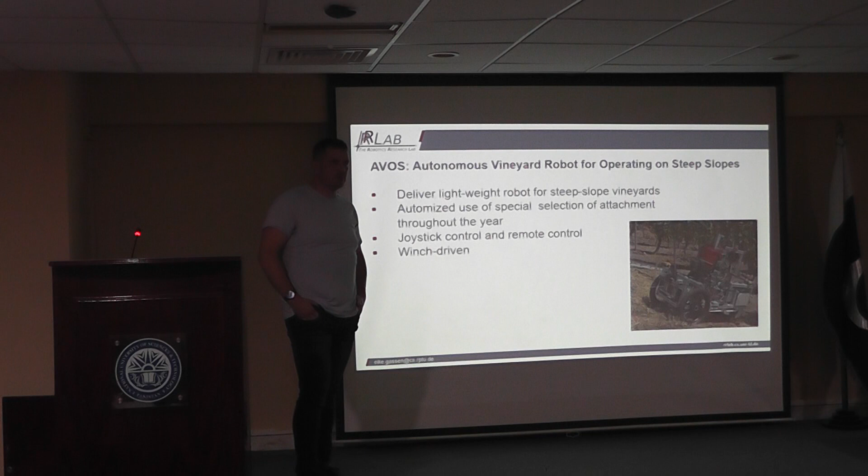I have a question about the diagram we saw. There was a pulley pulling up the tractors in the diagram. Yes, these pulleys pull the tractors upwards and then go in a cycle. So installing these pulleys can be an issue, and the technology is delicate on the tractor. What if the pulley breaks or something happens to it? Yeah, there's a safety problem, of course.

First of all, the rope is mounted and the winch is mounted on the vehicle, because if you do it that way, the vehicle doesn't really move over the ground. So it's not the vehicle, the steel rope that is moving over the ground, so it's not so likely that the rope will break. That is the first reason why we mounted it here.

But second, we have two approaches for how we want to do it. There's a safety brake, like a thorn or something going into the ground which blocks it. Additionally, we want to steer into the plant, because it's safer to destroy the plant and drive into it than to drive downwards and hit a vehicle or people. So we want to combine driving against the plant with braking by putting a thorn or something into the ground. Won't that destroy too much yield if the object is too heavy?

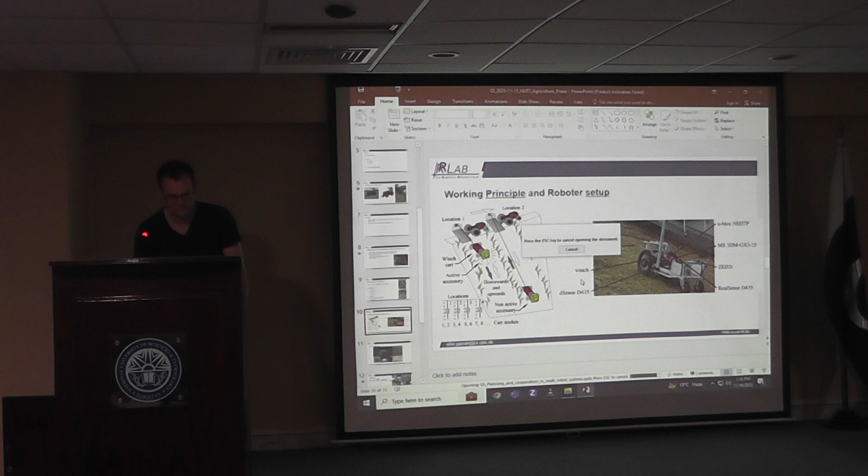Okay, so good evening everyone. Thank you for the introduction. My general topic is about planning and cooperation in multi-robot systems. So we still stay in commercial vehicles, but now we want to look at systems where we have multiple robots, theoretically also of different types, which want to work together with each other.

For that, I will shortly start with a project which was already running during my master thesis, where I also participated and worked for the first year, about autonomous street compaction. Then I want to look forward to some different scenarios, for example soil compaction, where we have much larger areas and a much wider variety of vehicles.

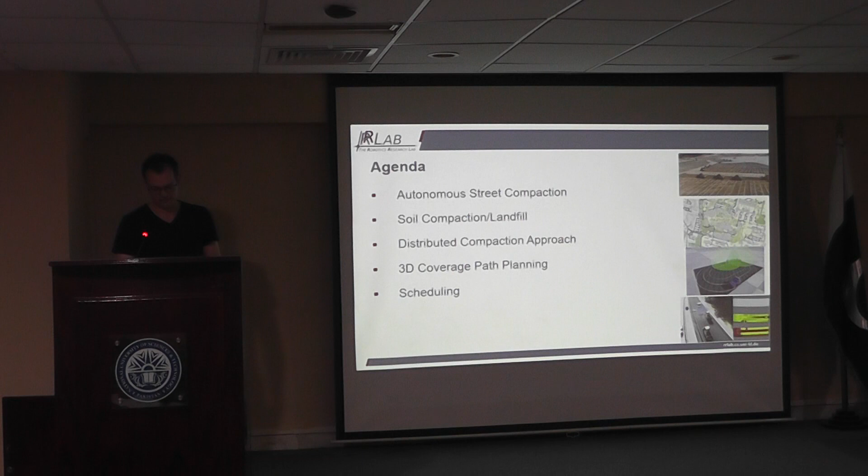Typically for road construction you have a paver, which is the vehicle in the background spreading asphalt. Then you have drum rollers which are compacting it. In that image it's only one, but typically you have multiple ones.

Up to now those tasks are always done by humans, and our aim in the project was to automate the compaction behind the paver. So we wanted to have autonomous driving drum rollers which can automatically drive different tracks.

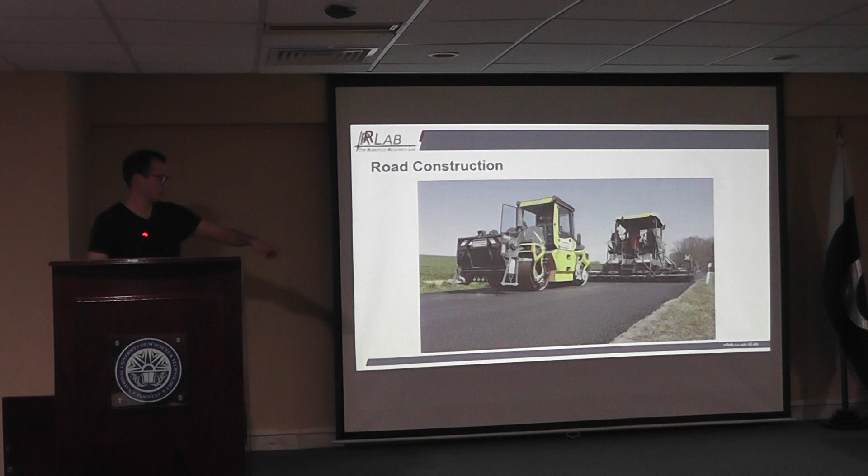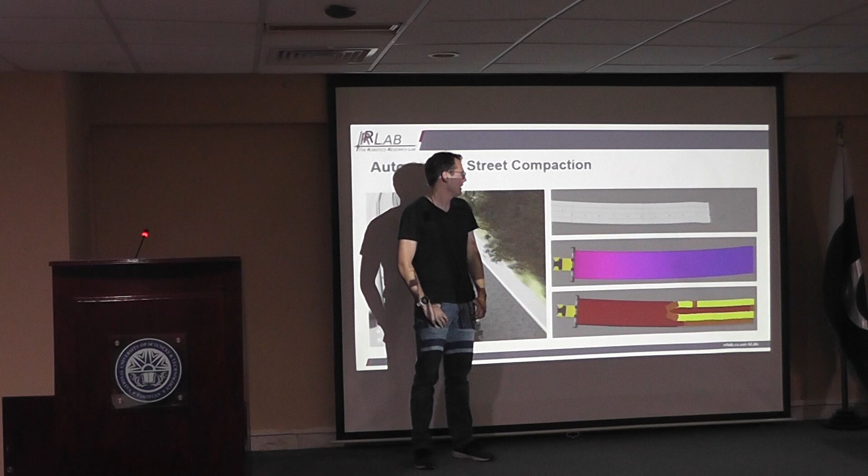They are also overlapping, because we don't want any areas which are not compacted in the end. This also means that while one vehicle is driving on the outmost track, no other vehicle can drive on the track next to it, because there would be a collision.

Then we had some properties to consider. One is temperature, because there are temperature ranges in which we can drive on the area. For lower temperatures we don't have any effect, because it's already too hard. For too high temperatures we could completely destroy the road, so we also have to wait a bit before driving on the ground.

Those temperatures can be measured on the paver in the front, and also by the rollers when they drive on the area. In the beginning we know the initial temperature, and we have a rough model estimating how fast the temperature is decreasing. When driving over the asphalt, we can also measure the current temperature, so we get an update as soon as we start driving there.

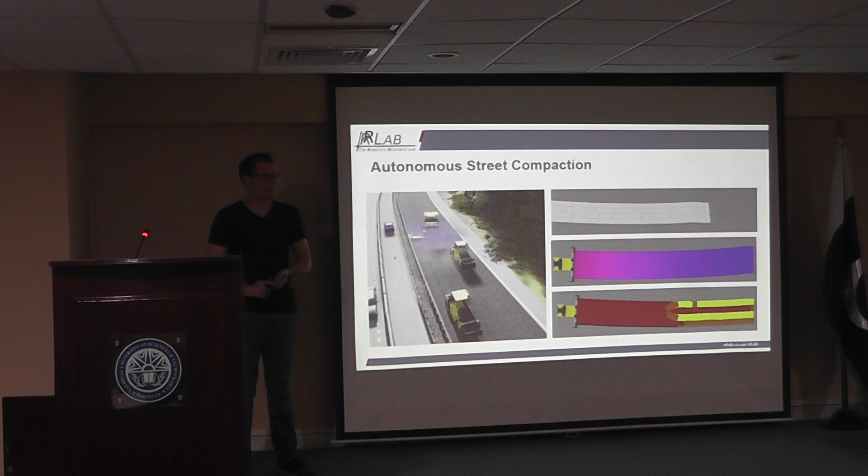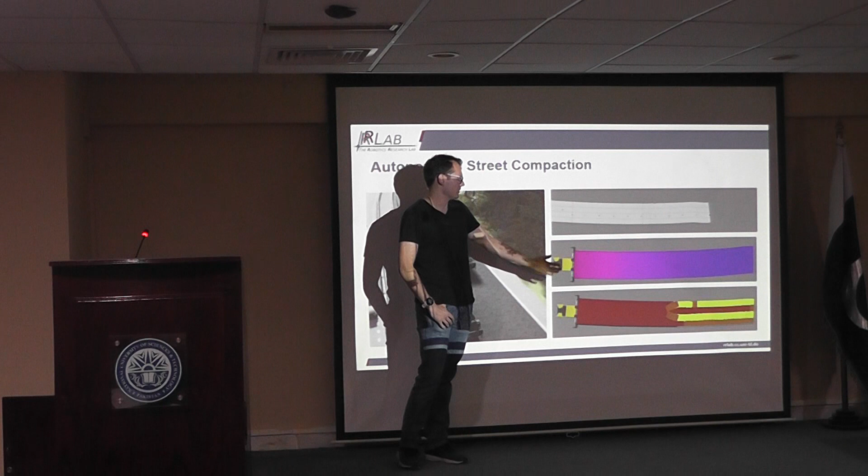We also have some measurement for the compaction, using two different methods. For the simulation, we just counted how often we drove on each area, shown here. The red area means we didn't drive at all, and it goes in the color range to green, which means it's fully compacted.

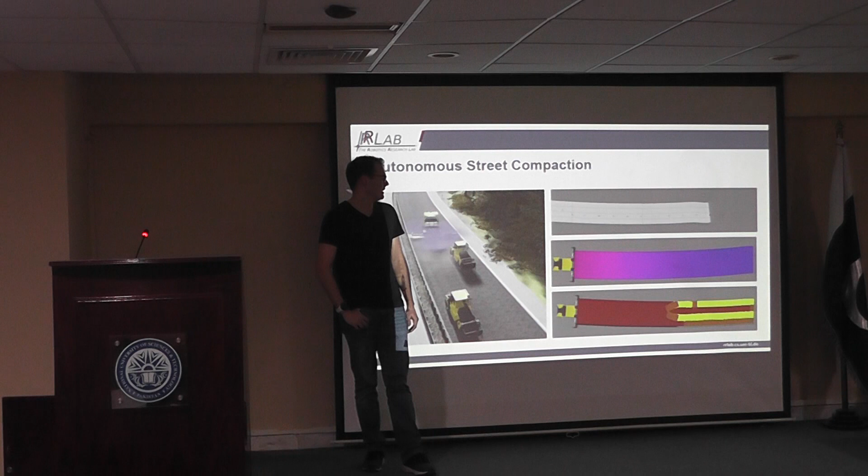For the simulation, we typically say we want to drive on each area 4 times. In reality we never did that in the end, but it's possible to measure the compaction also with a drum roller, so there we could take the real values to update the map.

So maybe I'll start with the video and explain a bit during it. This is one test in simulation. I think the speed here is 8 or 16 times the normal speed, because typically vehicles drive with, I think, up to 5 kilometers per hour, so really slow.

You can see we evaluate the tracks based on the compaction and temperature, and give a priority value to them, then assign them to the different vehicles. As soon as it's finished, or almost finished with driving, we look for the next possible track, and once again assign it to the vehicle.

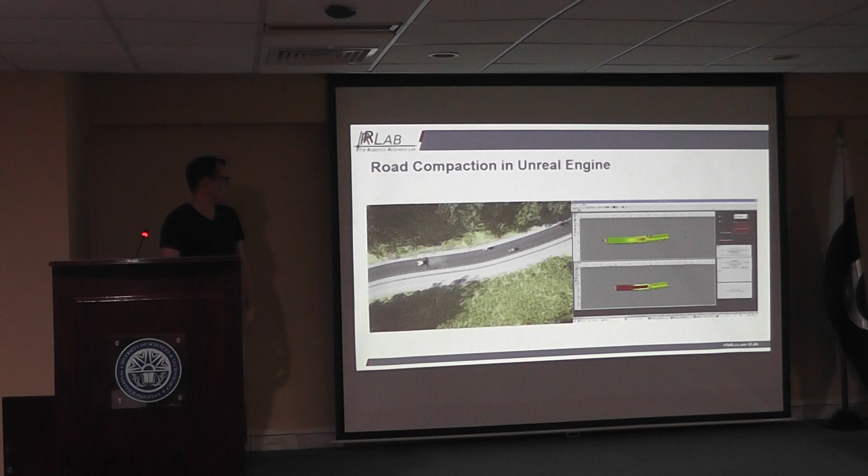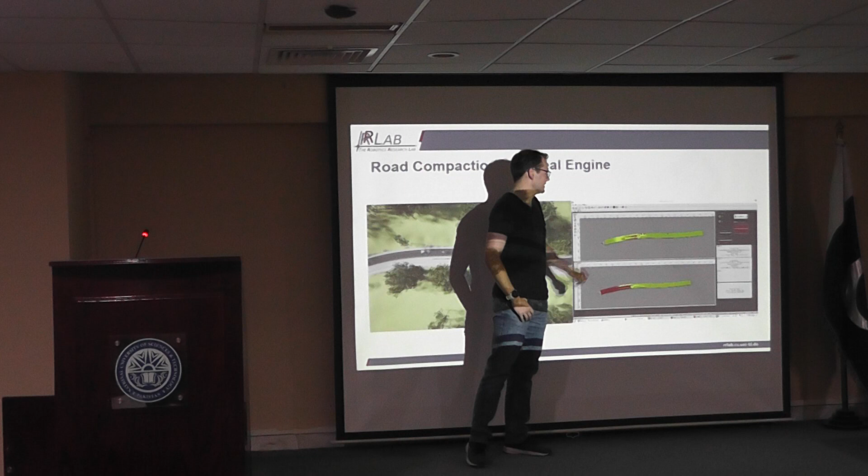Some tracks are blocked because of vehicles already driving there. We also have some cases where we want to compact 2 tracks in a row, just to save the time for maneuvering to the next one.

Here you also see one of the big advantages of the simulation, because it's possible to just start it and let it run for, I think the longest ones were like 45 minutes. And if something crashes, you can just restart and find why it happened, which is not that easily possible in the real scenario.

I think that was about 1 year into my PhD, when we also had a final presentation of our project.

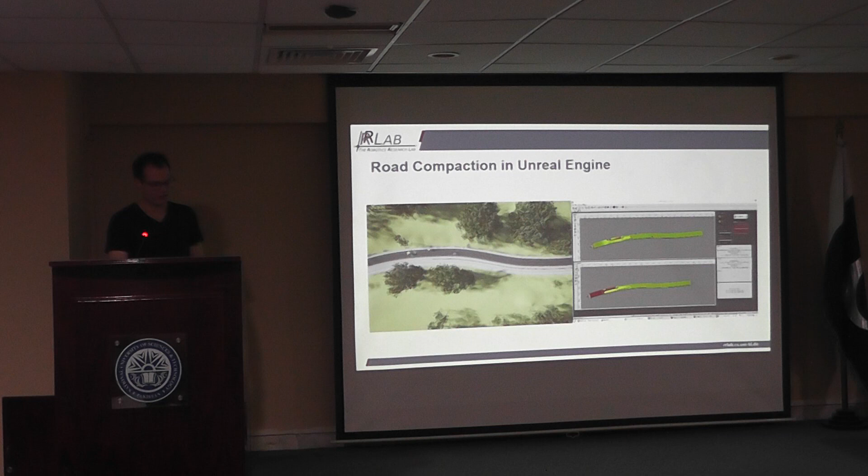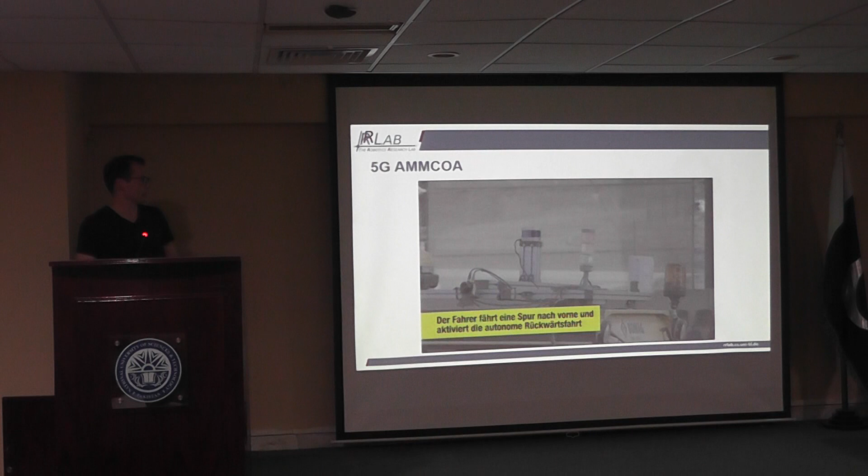We also have some other co-workers whose work was involved here. We had 2 of our drum rollers set up with different sensors. In one scenario we used GPS for localization. Here in the final presentation we used a LiDAR sensor because we were inside of a hall, so we used the structure of the hall and an iterative closest point algorithm to compare our point clouds with reference point clouds, and by that calculate our position.

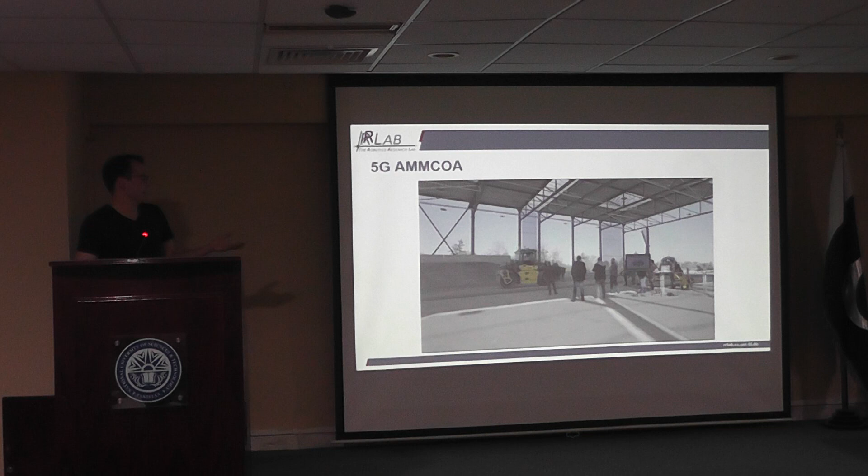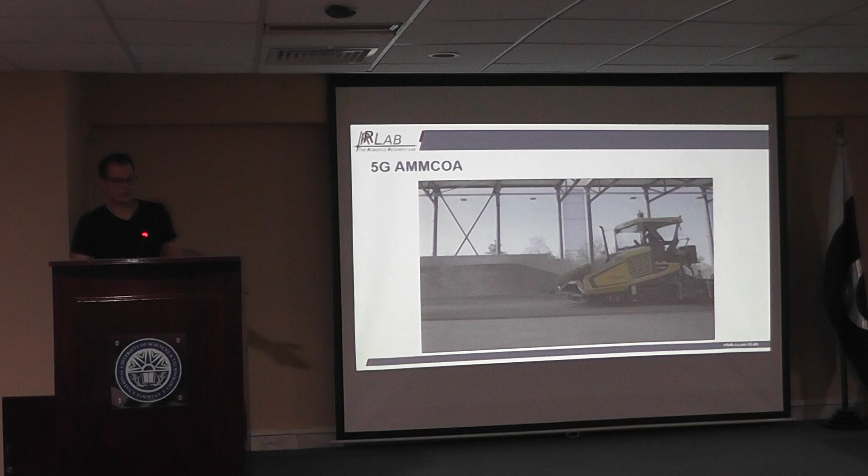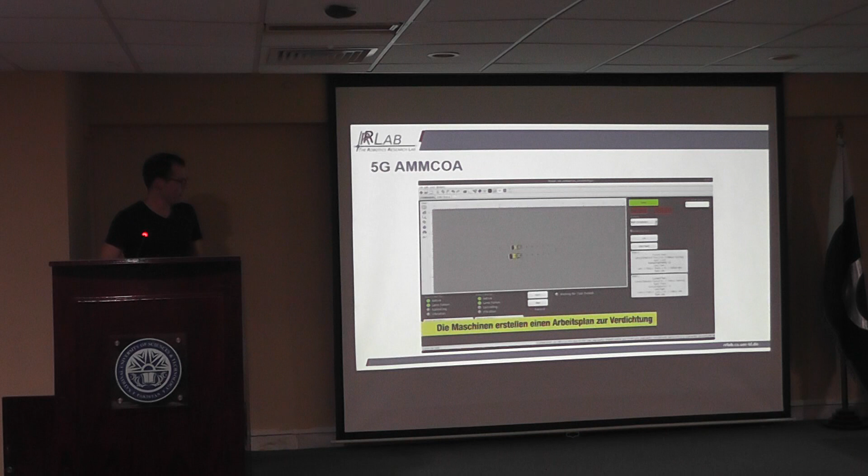We had 2 scenarios. In one, a driver drove forward and had to press a button, and while driving forward the machine was recording the points where it was, and then backwards the driving was autonomous. In the second scenario, we did it completely autonomously, so we had the area of the street, and as in the simulation, the rollers were splitting up the different tracks and driving fully autonomously.

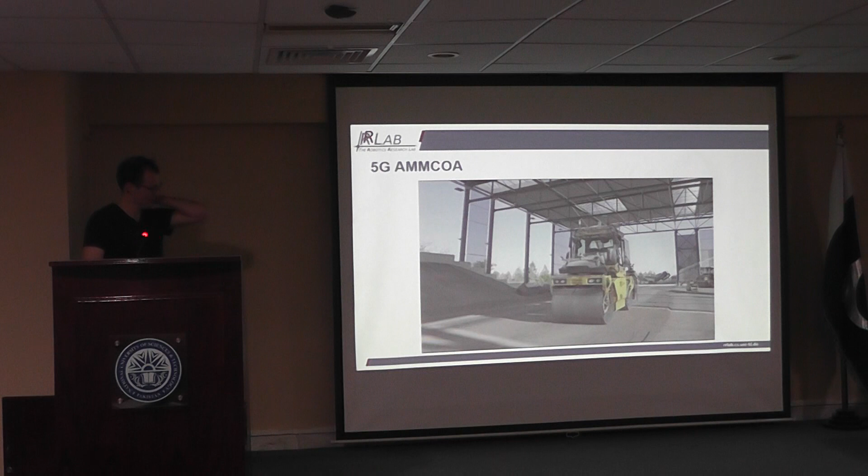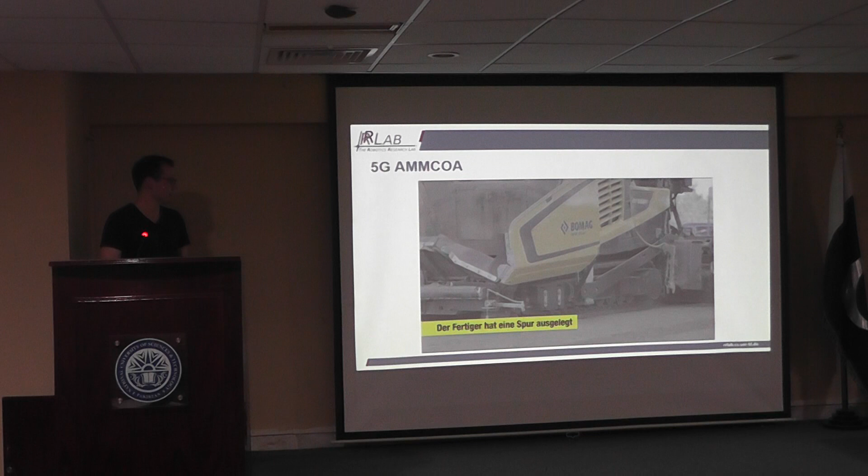In the end we had a test run where they drove for like 10 to 12 minutes without any problems where we had to stop. But obviously we were always standing next to the machines with an emergency stop, so it's not that trustworthy that you would just drive without observing. That part was driven autonomously, and where it wasn't autonomous, it was driven manually, so where we didn't do anything.

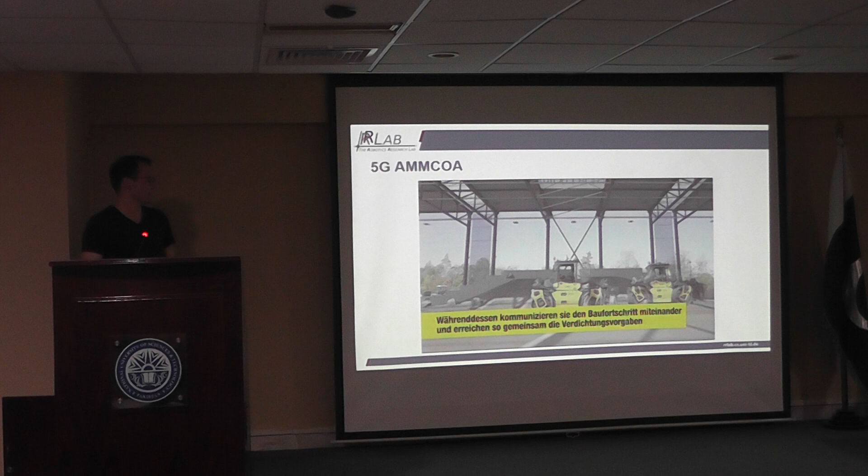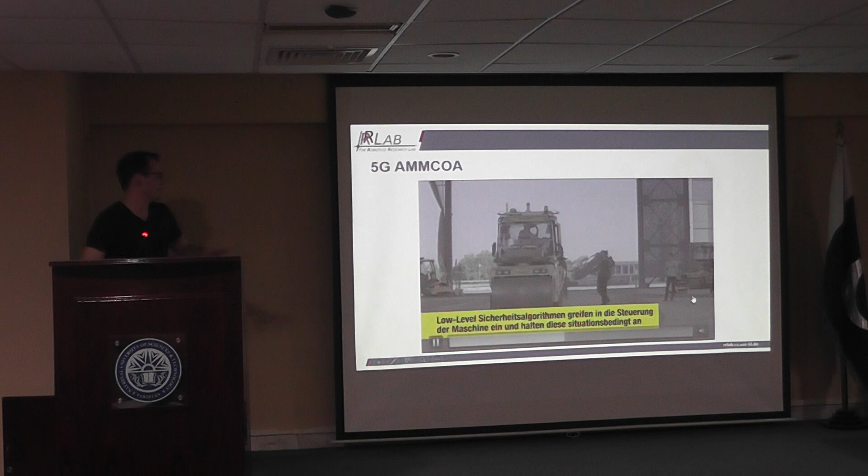Then we had some of the stuff with Axel, which Axel introduced in the beginning. We had our reaction framework, which has things implemented for safety stop, which I think we also saw here in the beginning, where a person could walk sideways to the vehicle, and it automatically stops if he gets too close, and as soon as he leaves, it starts again to drive. That actually worked quite nicely, but a few days before the presentation were very stressful.

Okay, so now let's move forward to the ideas I'm currently working on. I did, for example, that splitting up of a task during my master thesis. The idea was to go on with that concept of robot fleets, to split tasks between them and let them do bigger tasks in the end.

We thought of some different scenarios which are a bit more complex, because for the drum roller thing we only had a fixed area which was quite small, like maybe 10 meters of width and a length of a few hundred meters in the end, but always just a local area of 50 to 75 meters which has to be considered.

So first of all we thought of this scenario, which is soil compaction. We have a large area which could be a parking lot. In this example, it was given to us by the company we worked with, which was the creation of the Istanbul airport. You have a gigantic area, which in that case is more or less flat, and you have compaction works on it—ground compaction—because you want an even area where later on you can put asphalt and so on.

Here you have much more things to consider. One advantage is it's not as critical in terms of driving, because for asphalt, if you do sharp turns, you quickly destroy the ground, which was also something the project before we didn't really manage to solve, and we always had problems with steering—if you did it on real asphalt, it would quite often fail. So here those criteria are a bit less strict, but instead we have many more vehicles, different vehicles, and also a lot of different tasks, so the order of the tasks is different too.

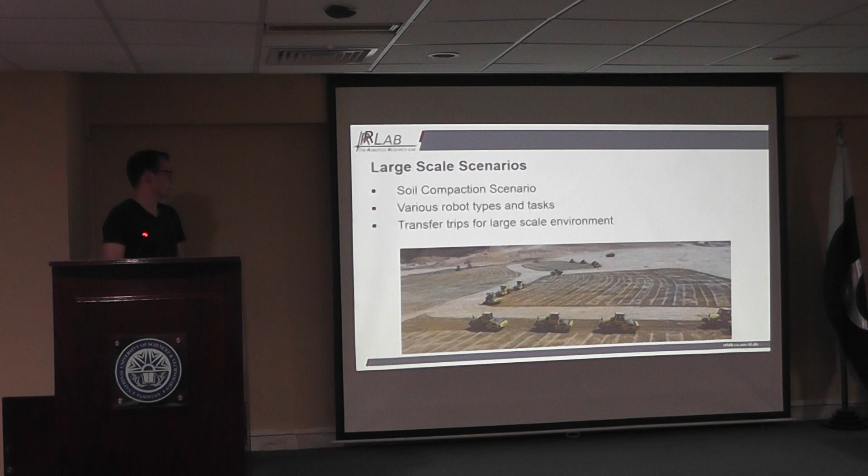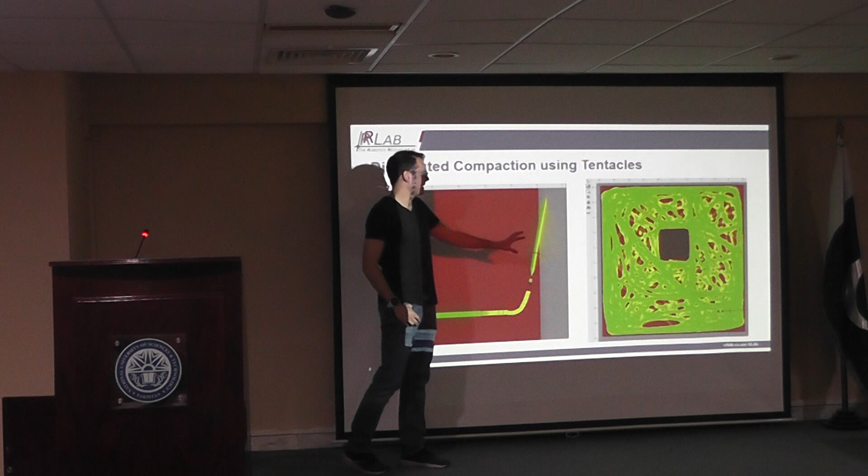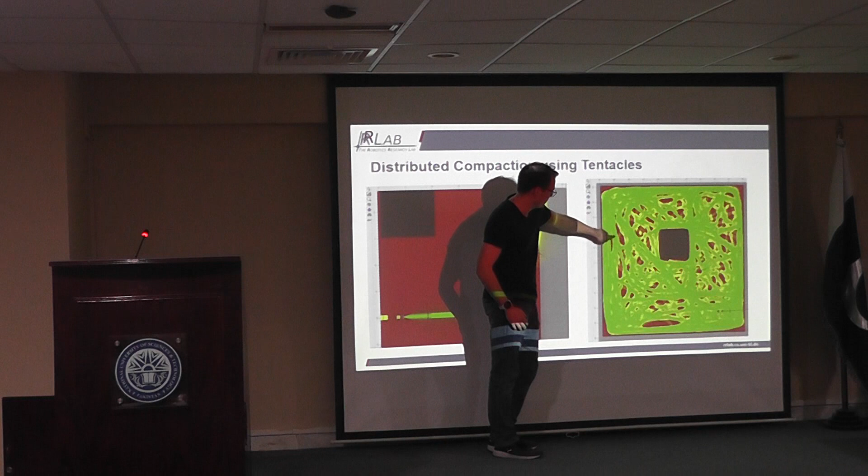But then, as you can see on the right, it's extremely chaotic. Sometimes the vehicle stands at a point, sees, for example, it could be right here, and now it decides okay, I drive to this area, and as soon as it's done, you only have finished area in your region, and then it's more or less confusing, it just randomly drives around.

We also tried to tune it a bit with some heuristics, like we say look in the map and find a point where it's not compacted, and so on. But for the real world scenario, that's not really usable at the end. At least we didn't manage to tune it so that it's as good as a simple approach where we just move up and down and always move it to the side.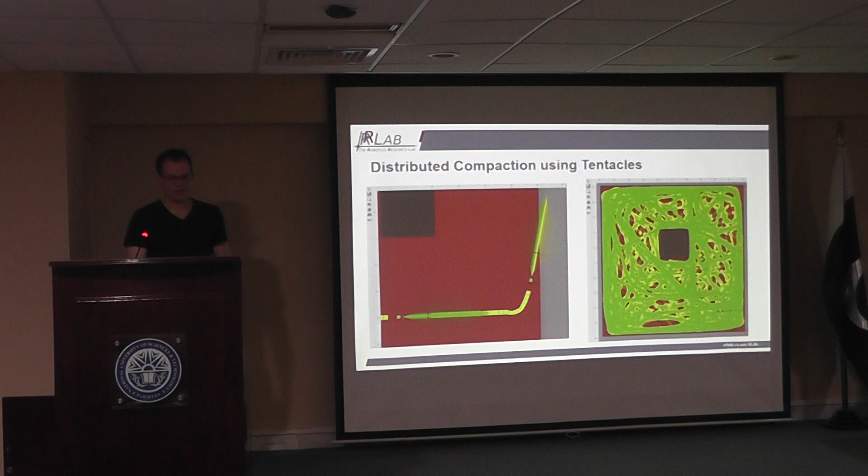So the general idea of that soil compaction seems to work quite well. But now the idea was, what if we have a more complex scenario?

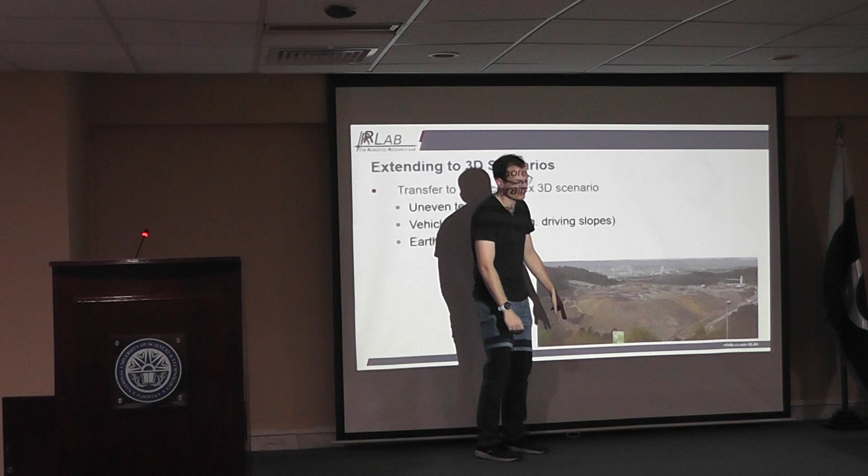Here we have an image of a landfill close to Kaiserslautern. Typically here you have trucks which drive up the hill, throw down the material, and we have machines which drive the slopes and compact them. That's more or less happening the whole day. In the beginning, this area was a canyon, and now it's more or less like a hill.

Now we wanted to consider those more complex environments, because at first we just had a flat area, used a 2D map, and we were happy. In this case, it doesn't work anymore, because we have to consider those slopes.

We have to consider the capabilities of vehicles, so some vehicles are able to drive the slopes, some might not be able to. We also have to consider that the environment is changing all the time, because after some days our hills are larger, the slopes could change. So we want to take all that into account.

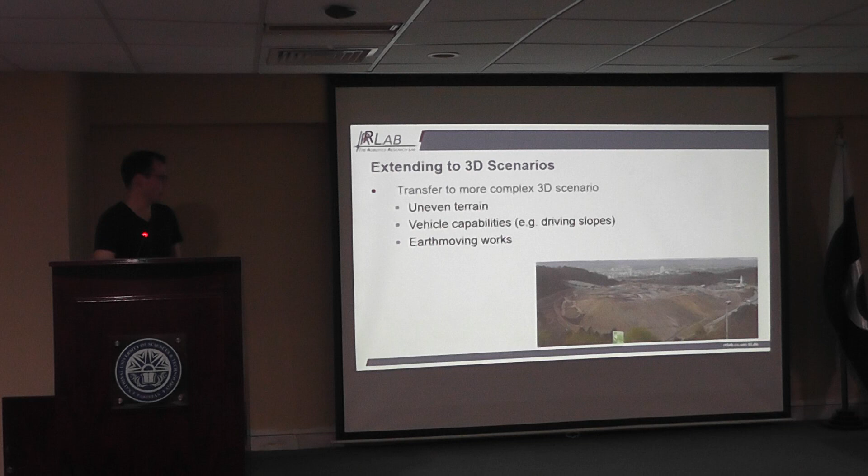And that's actually the work I'm currently working on. So I also looked into some previous works. For example, also for agricultural use cases, some stuff exists where the 3D area is mapped to a 2D map, and trajectories are calculated based on that 2D map.

This can be seen here, it was for some kind of field, not sure if it was a vineyard or something else, where I tried to map it to the 2D case, but calculate trajectories in the 3D case.

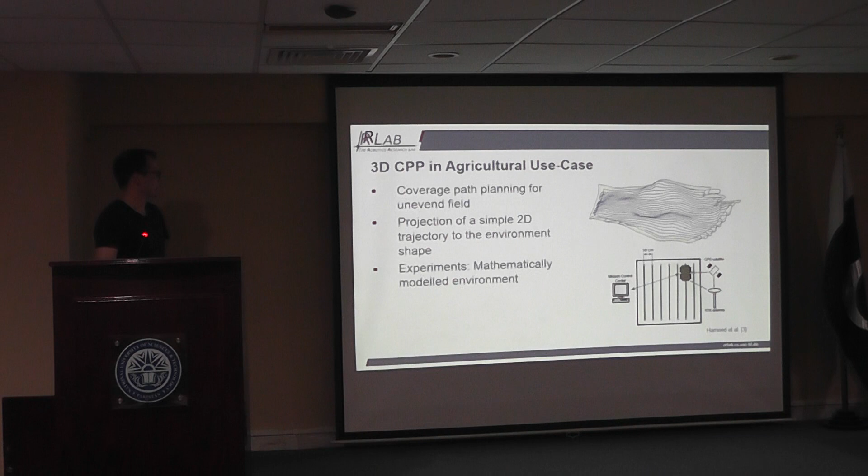My current work is on, well, that's the general aim: I want to have the decomposition of environment, splitting it up based on the different types of environment, and then group them together to have larger environments of one type more or less.

Do I have a flat area, do I have slopes? For the slope, the orientation and steepness are also relevant. I want some kind of segmentation of which area is of which type, to later on decide what vehicle is capable of doing the tasks. There could also be additional tasks like earth moving, which maybe later on should be considered.

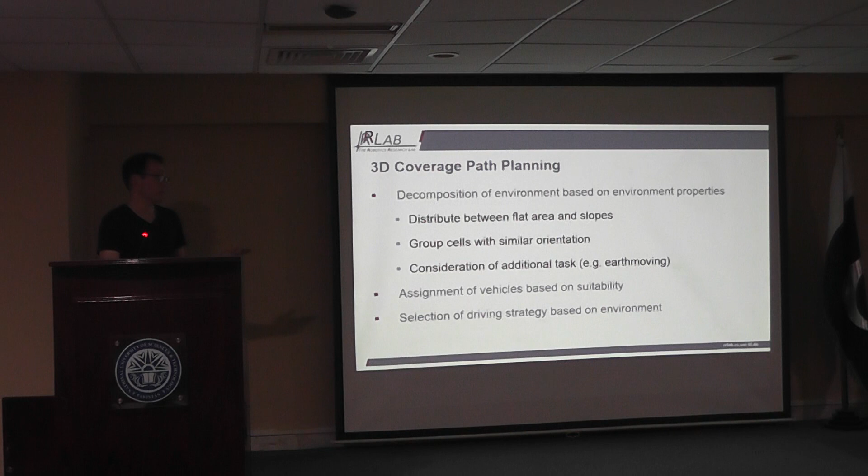Later on, the idea is to assign suitable vehicles, as was done before, and also select driving strategies based on the environment. For example, slopes have to be driven in a different way than a flat area, in a more restricted way. That's what I'm currently working on.

The aim is to find the data structure in which we can describe those environments. Here on top is one example for a city with a 3D voxel map, more or less like a grid map but in 3 dimensions, so we have cubes instead of cells. But what I'm currently trying to do is have a map as shown at the bottom.

This is also a grid map, but the cells are described by the normals of the ground. In case of a flat ground, my normal is always pointing upwards. If I have a slope, the normal is pointing outside of the slope.

Based on those normals, you can decide in which direction your area goes, and if you compare the normals of neighboring cells, you can also create larger shapes of a specific type, so a slope in a specific direction of that area. That's something I currently want to use.

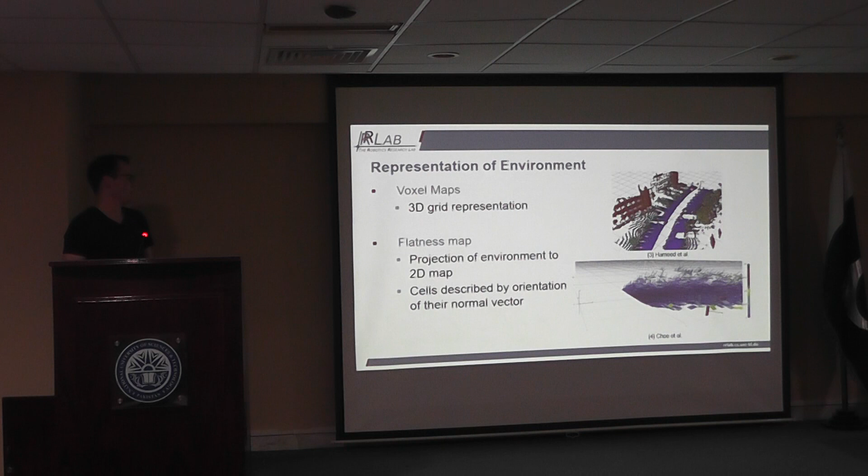So you have a point cloud, you put your points into a cell, then calculate the orientation of the ground in the cell, and then merge them together to get the segmentation of the area.

That's a bit off topic, which was a master thesis of a student I was supervising, but it also somehow fits into that whole idea in the end, because it was about the scheduling.

That's now a bit off topic because it was about the autonomous bus we have in our group. The idea was that we have an environment of a campus plus some additional areas, with a lot of buses. In our case, we have up to 10 buses with a seat capacity of 6 or 10 passengers.

The idea is that we have different requests which we want to assign to the buses. We look at how the bus can drive, where it can pick up someone and drop them off again. It was completely random where those requests could be spawned.

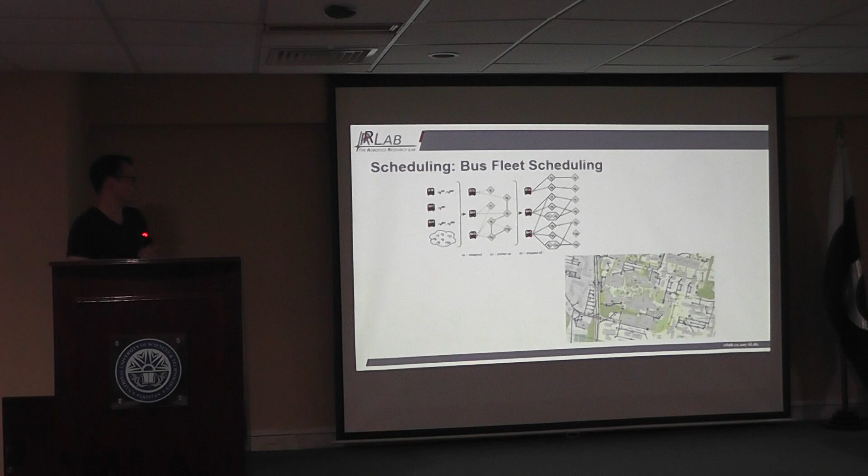I later on have the hope that I can also transfer this idea, so the scheduling of people to buses is more or less also usable to schedule tasks in our environment to my rollers. There's also the idea to later on use that approach in the soil compaction scenario. But I just want to quickly show it, I don't want to go into details.